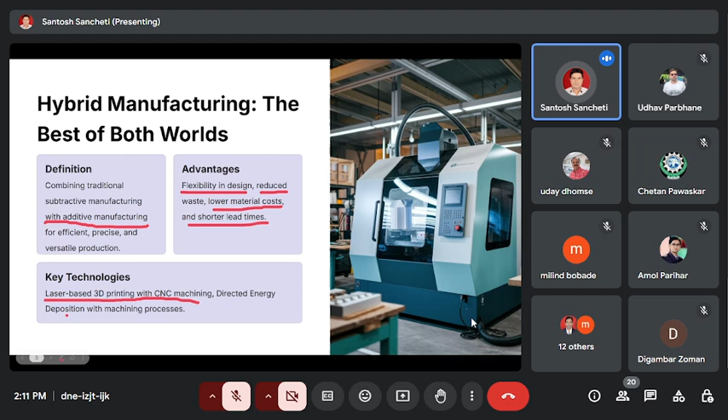Hybrid manufacturing can be utilized in the following areas, but is not limited to them. Nowadays it is applied in aerospace for custom parts, trial and error parts, lightweight structures, and high performance components. In the automobile sector, whenever industries are looking for prototyping, rapid tooling, and customization of parts, hybrid manufacturing provides great help. In the medical field, custom implants and prosthetics with high precision, and in tooling, the manufacturing of tools with complex geometry. So these are some areas where hybrid manufacturing is widely used: aerospace, automobile, medical, and tooling.

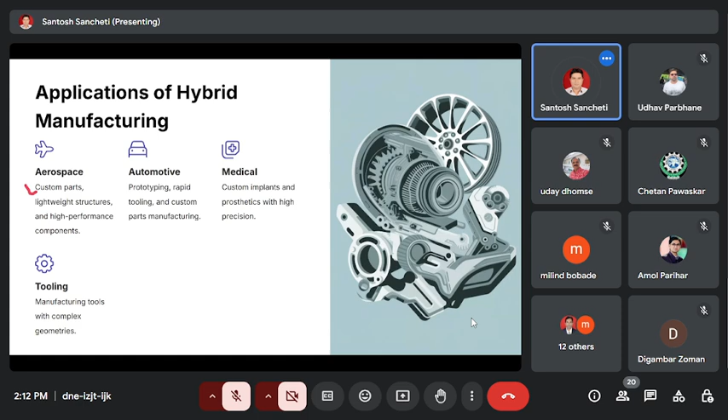Let us understand one case study, because here we have tried to give you insight through some case studies also. So let us have a look at one case study. This case study is GE Aviation's approach.

As a benefit, they have reduced the weight, the cost of material was reduced, efficiency was enhanced, and high performance was obtained. The key takeaway GE found by using this method is that hybrid manufacturing combines speed, accuracy, and material performance. Conventionally, when we talk about 3D printing, the problem we face is related to the speed of manufacturing. In hybrid manufacturing, the speed point is covered and we get the product manufactured with significantly high speed.

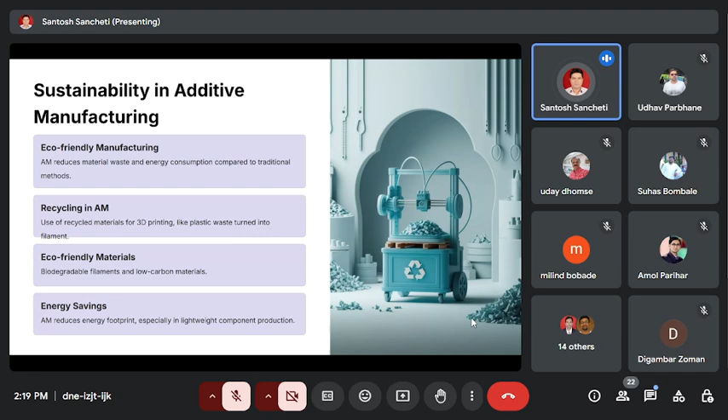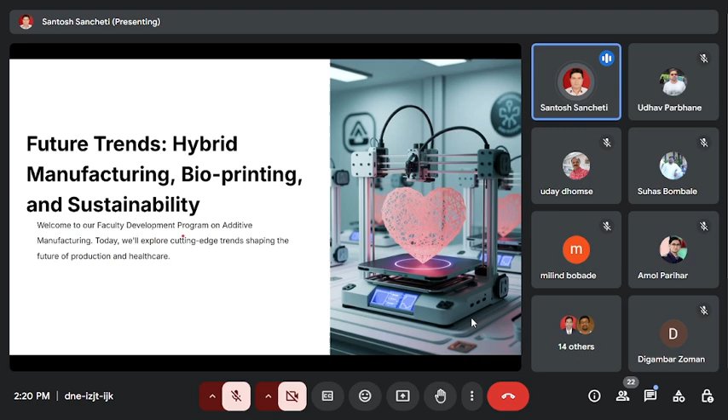So these are the three topics we are going to talk about today, three emerging areas: hybrid manufacturing, bioprinting, and sustainability. Let us understand each point in detail after understanding the topic.

Am I clear? Can somebody just chat or unmute and tell me? Am I clear after this? Yes, sir. Okay, thank you. Thank you, sir. Milind sir. Anyone else? Yes, sir. Okay, okay. Thank you, Nilesh.

So, the circular economy in additive manufacturing. The circular or sustainability point we are already discussing. So, the first point related to that is recycling. Here we can repurpose the plastic from e-waste or post-consumer products. It is possible. Material recovery: that waste material goes into new 3D prints.

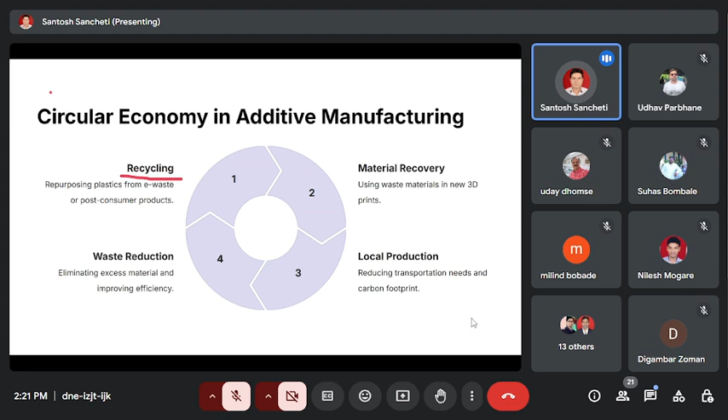Local production is possible, which reduces the transportation needs as well as the carbon footprint, because the component can be printed at the location itself and put into use, and waste can be reduced. So it will help the circular economy in the case of additive manufacturing.

Continuing on sustainability, a case study of additive manufacturing in the fashion area. Adidas, which is one of the famous companies for sports shoes and sports equipment, has used 3D printing to create recyclable footwear. Footwear is manufactured till date with the conventional process. Adidas has used this particular technology to create recyclable footwear.

Naturally, it will reduce the wastage, as well as give customer fit shoes, because till date whatever shoes are available come in standard size and shape. So with the help of 3D printing, custom fit shoes can be created. Particularly sports persons and athletes want custom fit shoes, so that helps them use the shoes as per their exact requirement. And naturally it will reduce the carbon emission also. So the fashion industry is also moving towards sustainability with the integration of additive manufacturing.

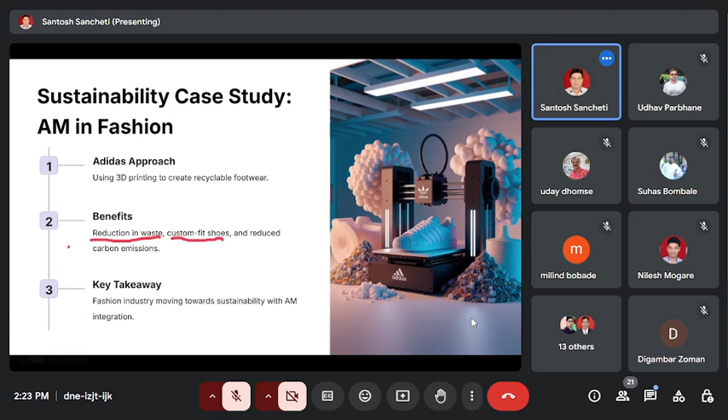So these are a few case studies where till date they have successfully implemented 3D printing technology in the different domains we are discussing. But still the journey is too long. Nowadays, we know it is the era of AI, and no sector in the world can stay apart from AI integration. Day before yesterday, if you read the newspaper, the AI integration technology used by a farmer in Baramati was appreciated by world technology leaders from Microsoft. Satya Nadella also appreciated it.

So AI integration into 3D printing is one of the key areas of research in the upcoming era, where AI algorithms will help us optimize the design and automate the production processes, because till date, for whatever 3D printing we are doing, we need to create a conventional design with the help of some CAD software and then import that file into the 3D printer. If we assist that process with AI, it will optimize the design and automate the production process also. So this is one of the future trends or emerging directions.

Then 3D printing in construction. Around the globe, we find 3D printing used for buildings as well as infrastructure with sustainable material. Some cases are available where an entire house or cabin is created with 3D printing using sustainable material. And advanced bioprinting: as we have already discussed, bioprinting is still in the baby phase, but with the developments coming up, the day is very near when printing full organs for transplantation will be possible with 3D printing.

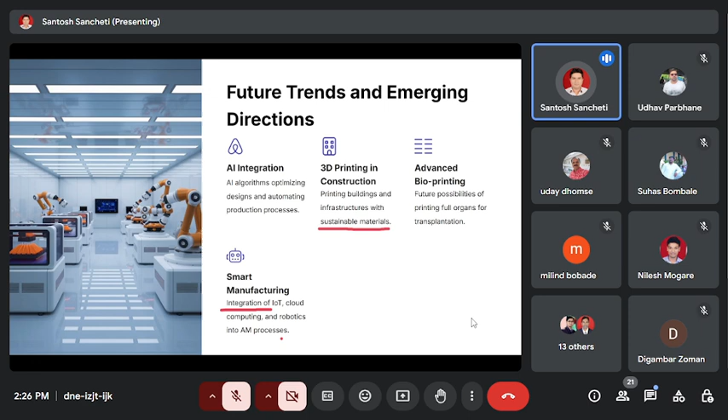And smart manufacturing, because in today's era manufacturing is nothing but the integration of all the technologies. So IoT integration is possible, cloud computing is also possible, and robotics can also be integrated into the additive manufacturing process. So these are all future trends as well as emerging directions. As you have already gone through a lot of things, I'm just trying to give you insight into the newer points only.

So, what are the challenges and opportunities for future additive manufacturing? Challenges right now: there are limitations of materials. Not all the materials we are using can be used for 3D printing. Scalability is an issue because the speed of 3D printing is very low, so scalability is one of the bigger issues. Regulatory hurdles exist, and the cost of components manufactured by 3D printing is considerably high.

But opportunities are available: innovation in material science. So whatever problems we are getting due to the limitations of materials, opportunities can come to our door as there is continuous innovation in material science. Just a few days back, at one of the summits, I met a startup founder who came up with the unique idea that the shoes manufactured by his company are made from waste plastic, and believe me, with this new concept, he is getting very good revenue from the market.

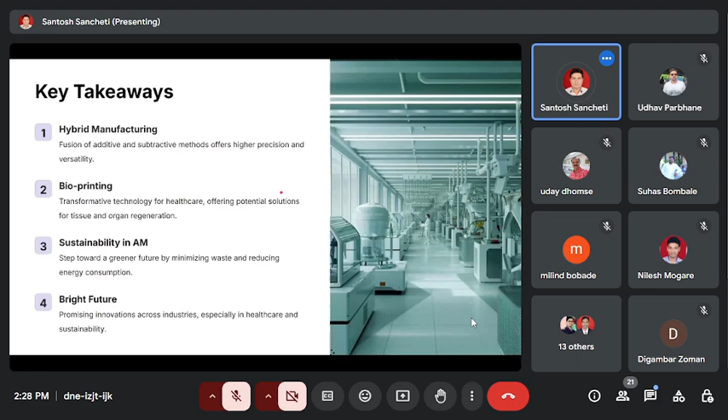Another opportunity is that rapid prototyping as well as customization is possible with 3D printing. And ethical considerations are driving healthcare innovation; again, there are innovations or opportunities available. So let us go into detail now. As I have given you a very clear idea about all the things, now we'll go through each and every point in detail. Our first point of discussion was hybrid manufacturing.

So hybrid manufacturing is very simple. Design or create a complex 3D part using CAD software. Use 3D printing to build a basic structure, layer by layer manufacturing. Refine the printed part using CNC or other subtractive methods. And finishing: if you need it, you can apply surface treatment or additional processes as and when needed. So this is, very simply, what hybrid manufacturing is.

So design is our regular process where we design a complex 3D part using CAD software. Then 3D printing builds the basic structure, layer by layer. Refine or machine the printed part using CNC or any other subtractive method. And in finishing, apply the surface treatment or additional process as and when needed.

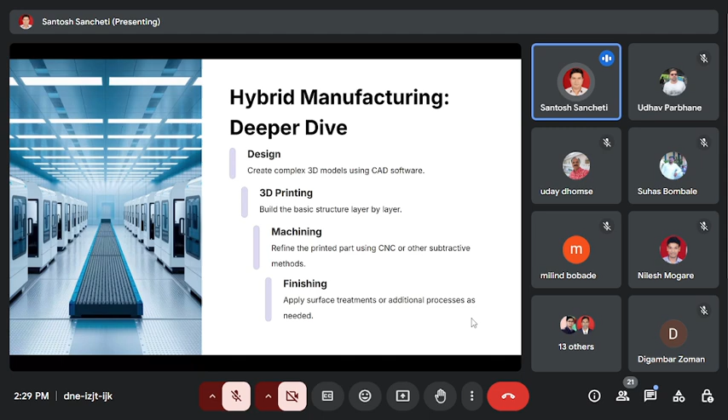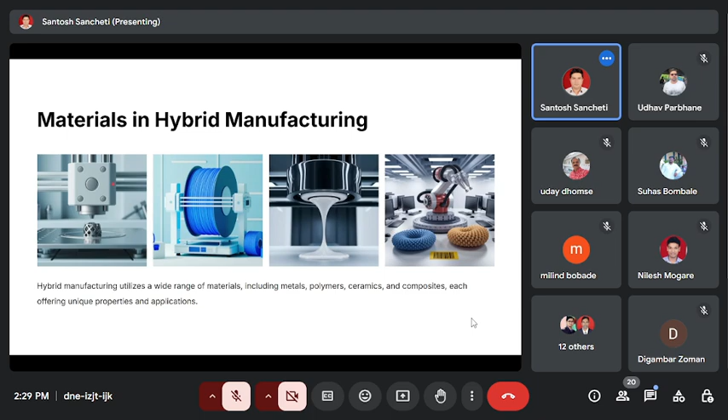Which are the materials used in hybrid manufacturing? Hybrid manufacturing can utilize a wide range of materials including metals, polymers, ceramics, and composites, and each material offers unique properties and applications. So these are the different materials that can be utilized in the 3D printing of hybrid manufacturing.

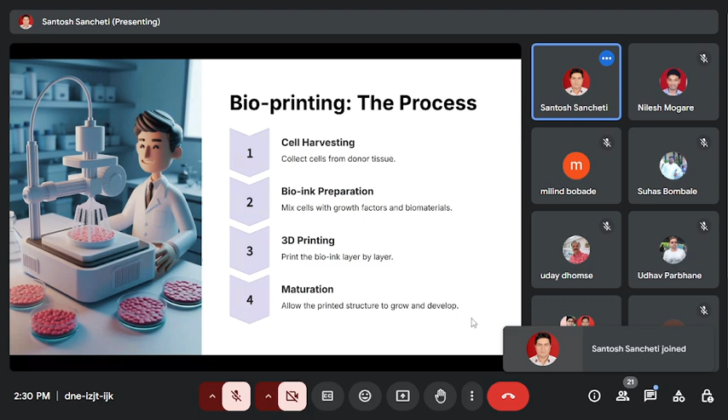Now let us go to the second part we are talking about, that is bioprinting. Before we really go into the area, this is a very interesting area. I will play one video and after that we'll go for the bioprinting discussion. Just a minute.

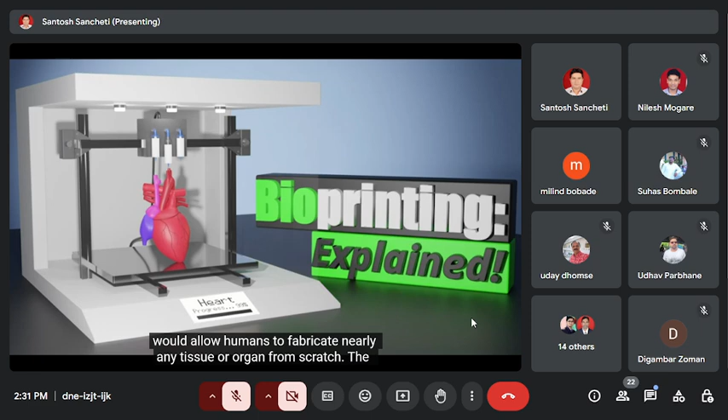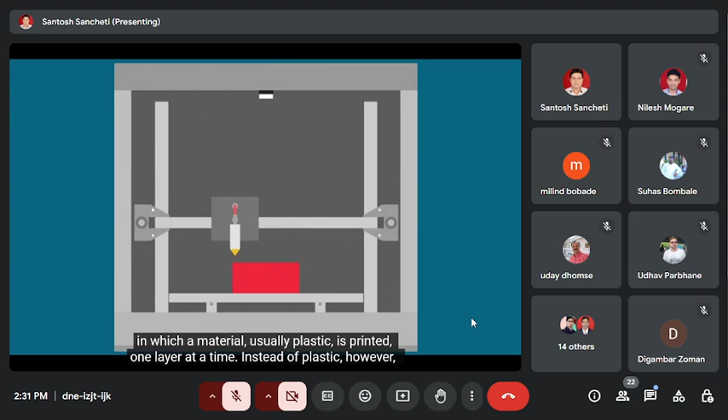Also known as bioprinting, is a relatively new technology that, in theory, would allow humans to fabricate nearly any tissue or organ from scratch. The fundamental idea behind bioprinting is quite similar to that of ordinary 3D printing, in which a material, usually plastic, is printed one layer at a time. Instead of plastic, however, bioprinters use bioink, usually composed of cells suspended in a special gel known as a hydrogel, which helps to protect, nourish, and hold the cells together. Some bioinks use a single type of cell, while others contain multiple types of cells, or multiple bioinks are used side by side, each with a different cell type.

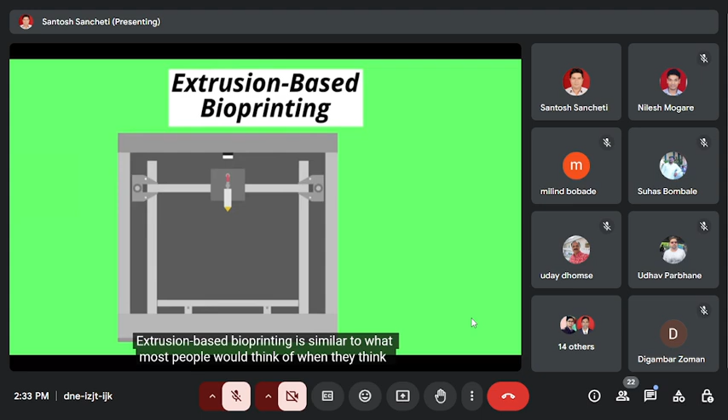There are three categories of bioprinting that I will be discussing in this video, which differ in the method by which they turn the bioink into a specific shape. Note that because this is an emerging technology, the exact names and classification of various methods vary from source to source. The concepts, however, are universal. I choose to group the methods into extrusion-based bioprinting, droplet-based bioprinting, and energy-based bioprinting. Extrusion-based bioprinting is similar to conventional 3D printers. It involves forcing continuous filaments of a material through a nozzle in a controlled manner to create a 3D structure. The material is bioink, which usually consists of cells and a hydrogel.

The filaments are forced through a nozzle by either pneumatic pressure, which is basically air pressure, or mechanically derived pressure from things like pistons or screws. The bioink must be stabilized quickly, or else it will not retain its shape. It can be stabilized in a number of ways, largely depending on the hydrogel used. For example, during printing, the bioink can be stabilized by spraying a mist with a cross-linking agent dissolved in it. Cross-linking just means linking one polymer chain to another. In contrast, droplet-based bioprinting deposits discrete volumes or droplets of bioink onto a surface. Methods include inkjet-based, microvalve-based, and laser-induced forward transfer bioprinting.

As with extrusion-based bioprinting, the bioink must be quickly stabilized in order for the structure to retain its shape, and the exact manner in which this is accomplished depends on the hydrogel being used.

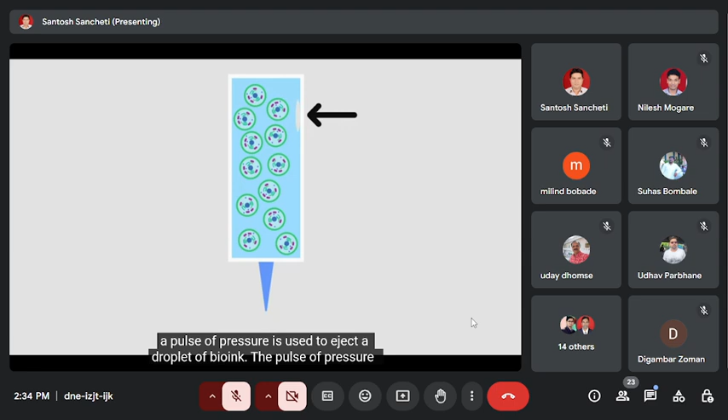Inkjet-based bioprinting shares a lot in common with traditional inkjet printing. Here's how it works. At a high level, a pulse of pressure is used to eject a droplet of bioink. The pulse of pressure can be generated in one of two ways, using thermal mechanisms or piezoelectric mechanisms.

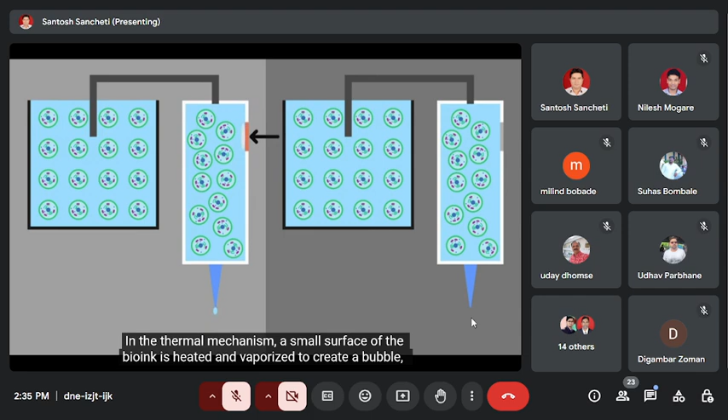In the thermal mechanism, a small surface of the bioink is heated and vaporized to create a bubble, which occupies a larger space than the liquid bioink did, creating pressure, forcing a droplet of bioink out of the nozzle. Once the bubble collapses, a bit of bioink is sucked from the reservoir, refilling the chamber, and the process is repeated.

In the piezoelectric mechanism, an electric current is applied to a piezoelectric actuator, causing the chamber to deform slightly, forcing a droplet of bioink out of the nozzle. By the way, a piezoelectric actuator is a device that responds to an electric current by stretching and bending. Then, when the electric current to the piezoelectric actuator ceases, the shape returns to normal, and a bit of bioink is sucked from the reservoir, refilling the chamber, and the process is repeated.

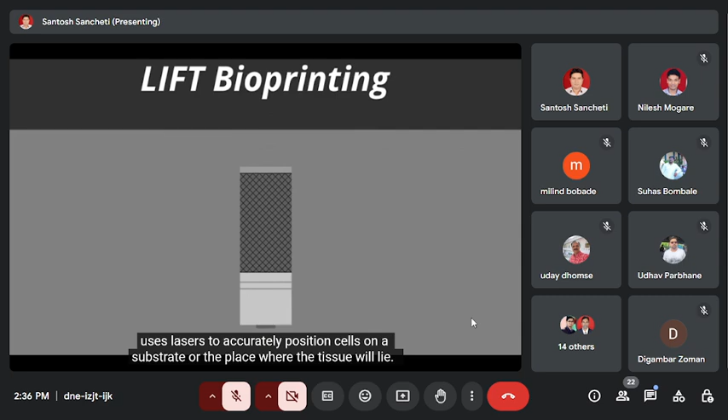Next, microvalve-based bioprinting involves small valves that can be accurately opened and closed with electromagnets to deposit droplets of bioink, which is under pressure, usually pneumatic pressure, meaning air pressure. Laser-induced forward transfer bioprinting uses lasers to accurately position cells on a substrate, or the place where the tissue will lie.

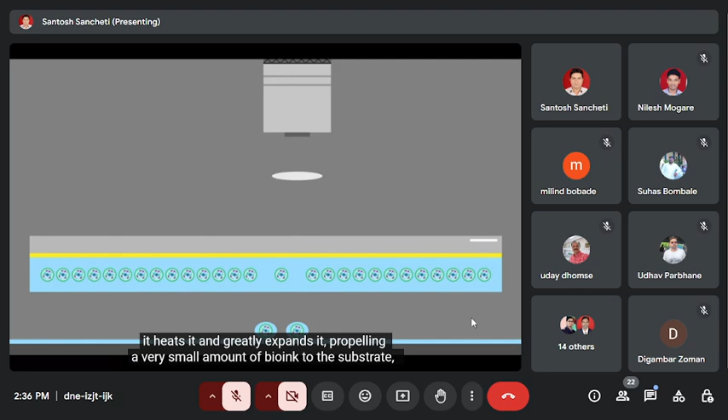Laser-induced forward transfer bioprinting consists of a laser, a focus lens, a ribbon, and a substrate. The ribbon could contain a sheet of transparent quartz glass with a very thin gold coating and a coating of bioink. When the laser reaches the gold, it heats it and greatly expands it, propelling a very small amount of bioink to the substrate, which will have been coated with hydrogel to dampen the kinetic energy of the droplet of bioink. This laser is quite precise, and hence this method is also quite precise.

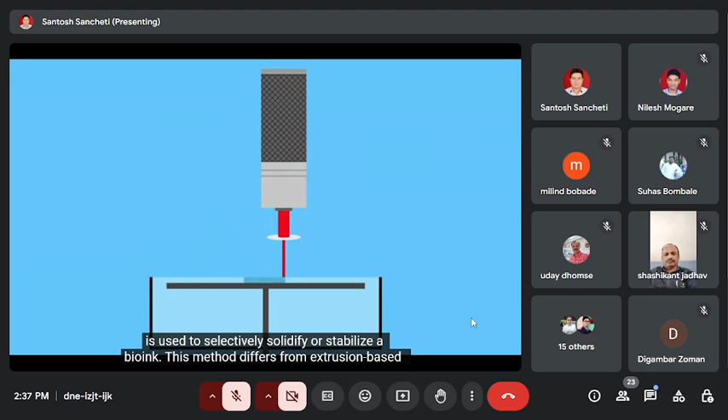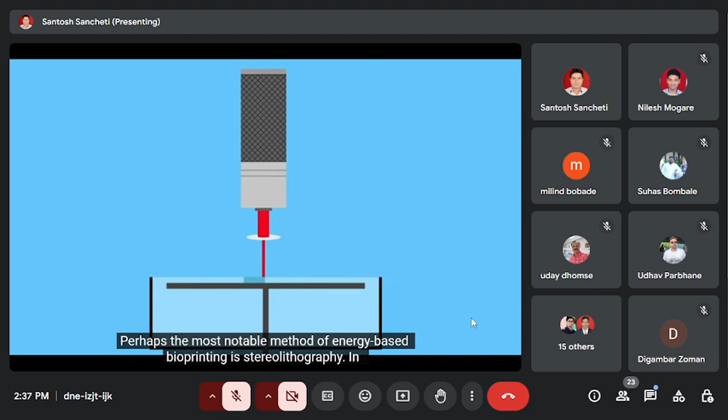Finally, in energy-based bioprinting, a focused energy source, often a laser, is used to selectively solidify or stabilize a bioink. This method differs from extrusion-based bioprinting and droplet-based bioprinting in that the bioink is already in place. Perhaps the most notable method of energy-based bioprinting is stereolithography. In stereolithography, a laser is employed to selectively harden a small amount of bioink, which contains a light-sensitive hydrogel.

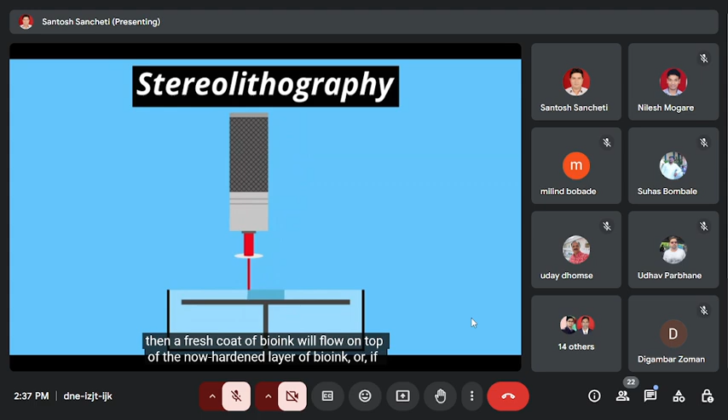This substance lies on a platform that is then moved away from the laser by a small amount. If, in doing so, the platform is immersed into bioink, then a fresh coat of bioink will flow on top of the now hardened layer of bioink, or if the platform has sidewalls, then a fresh layer of bioink can be coated separately. This process is repeated, eventually leaving you with a solid 3D structure once the liquid bioink is washed away.

Each category of bioprinting has its own pros and cons. I won't bore you with all the specifics. However, as an example, laser-induced forward transfer bioprinting is precise and has a high printing resolution. Nevertheless, it is expensive, cumbersome, and time-consuming. Hence, different methods are used for different needs.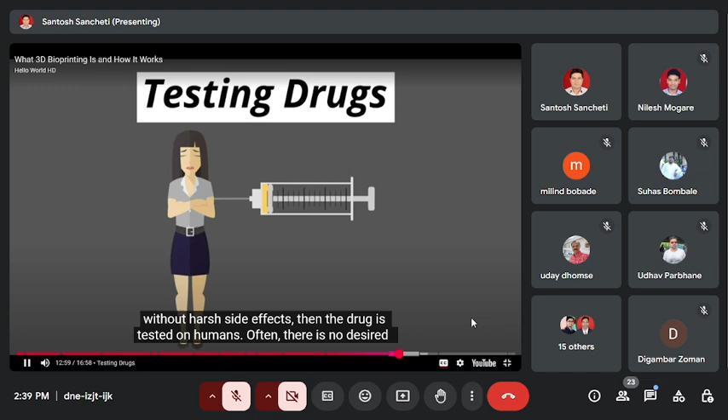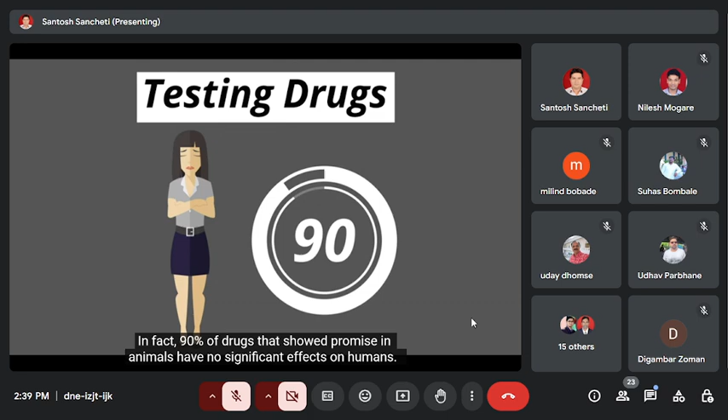...effects, then the drug is tested on humans. Often, there is no desired effect on humans, rendering the money invested in developing that drug a waste. In fact, 90% of drugs that showed promise in animals have no significant effects on humans. Occasionally, the drugs can even harm the humans being tested. This testing process is extremely expensive and inconvenient.

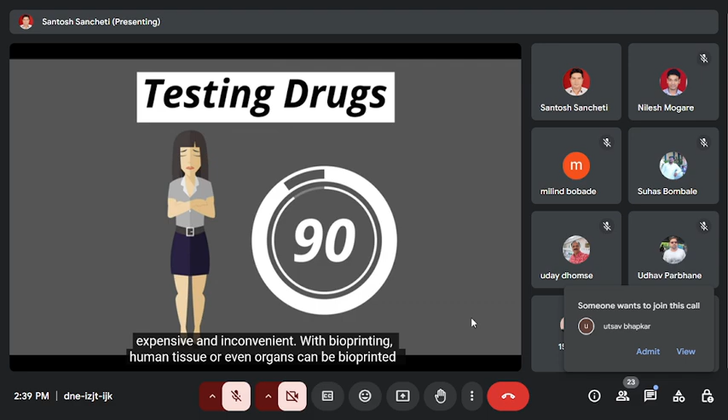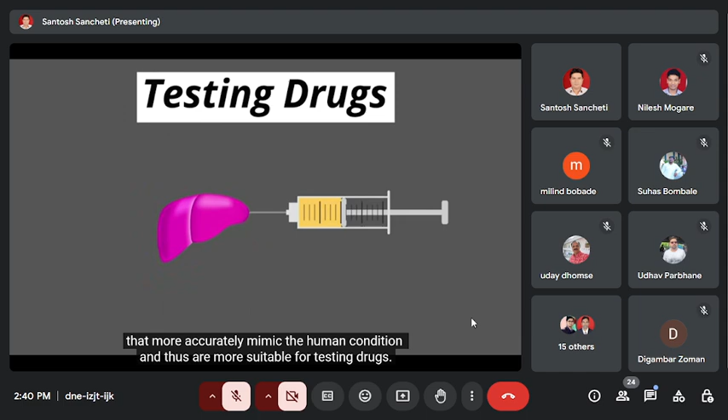With bioprinting, human tissue or even organs can be bioprinted that more accurately mimic the human condition and thus are more suitable for testing drugs. An organ on a chip is a simplified miniature version of an organ that aims to mimic a real organ so that it can be used to test a new drug. Technically, organs on chips are not inherently related to bioprinting, but bioprinted tissue can be used to enhance such devices with better positioning of cells and reproducibility.

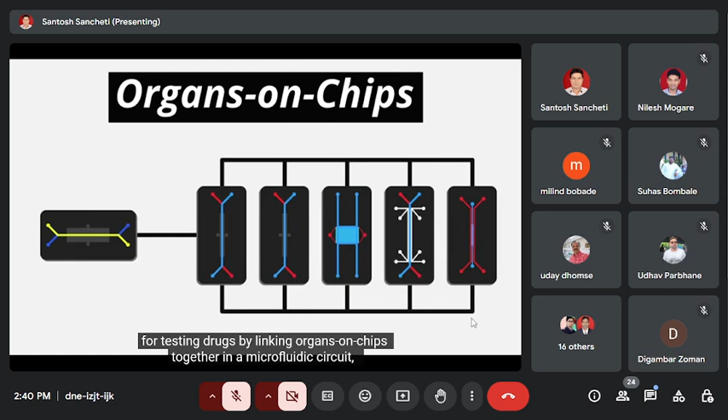In the near future, it may be possible to have a nearly perfectly accurate system for testing drugs by linking organs on chips together in a microfluidic circuit, which would be known as a human on a chip. What this means is that to test an oral drug, for example, the drug could first be introduced to a partially bioprinted gut on a chip, which would absorb the compound and send it to a partially bioprinted liver on a chip, where it is metabolized.

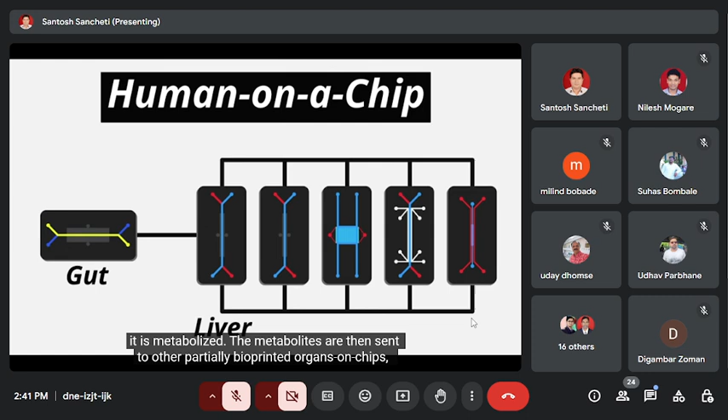The metabolites are then sent to other partially bioprinted organs on chips, including the kidney on a chip, heart on a chip, lung on a chip, and bone on a chip. Throughout this process, the organs are tested for any intended or unintended response to the drugs. A similar pipeline could be used to test the safety and effectiveness of other forms of drugs.

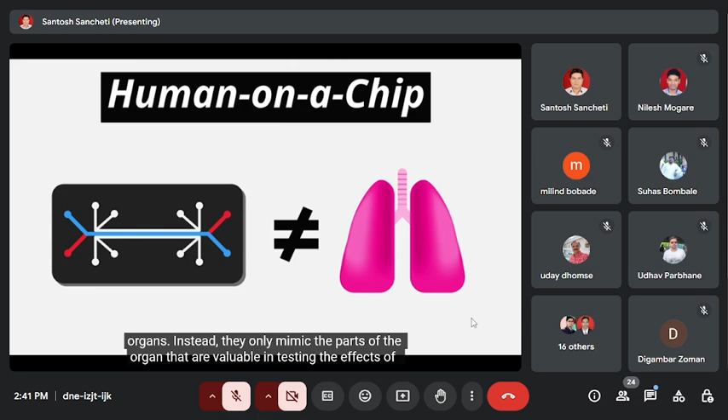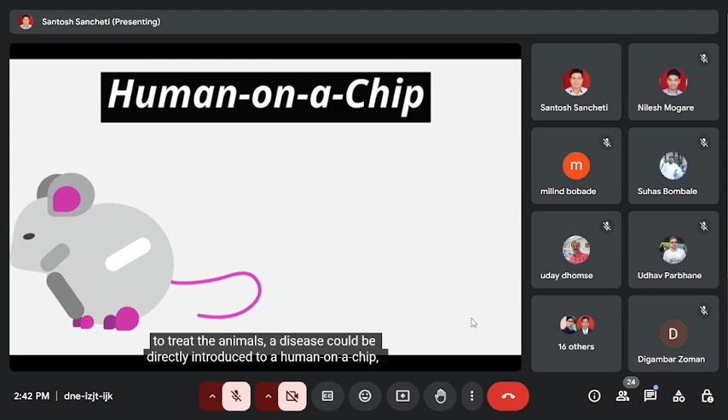Note that in this process, organs on chips need not have the full functionality of particular organs. Instead, they only mimic the parts of the organ that are valuable in testing the effects of a new drug. Also, instead of introducing a disease to healthy animals and then testing various drugs to treat the animals, a disease could be directly introduced to a human on a chip, reducing the amount of unnecessary suffering. In summary, using bioprinting to test new drugs could be both more efficient and more ethical.

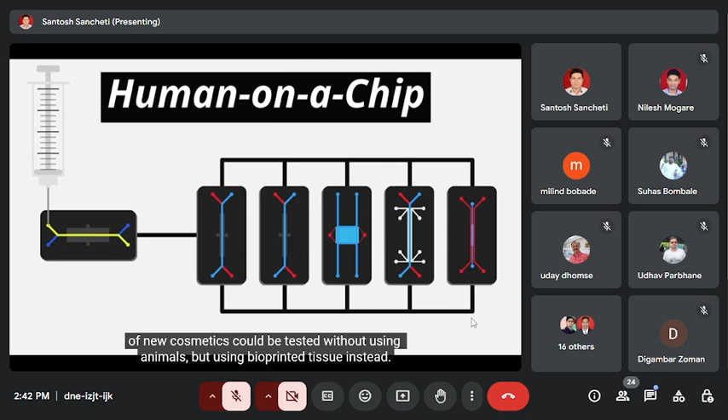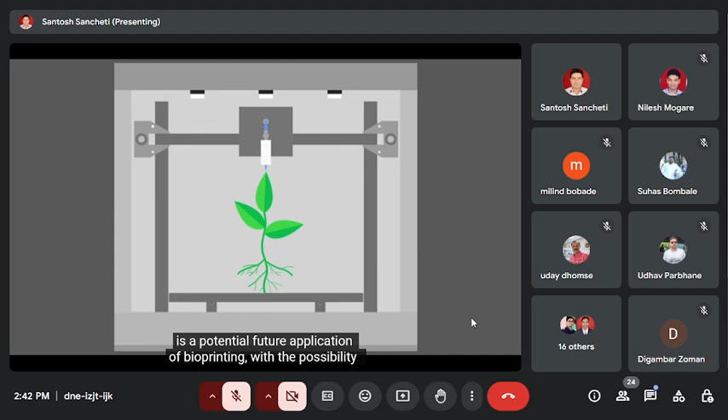In a similar way, the safety of new cosmetics could be tested without using animals, but using bioprinted tissue instead. Although it would come with important challenges of its own, bioprinting plants is a potential future application of bioprinting, with the possibility of creating new plant varieties with desired traits for agricultural use.

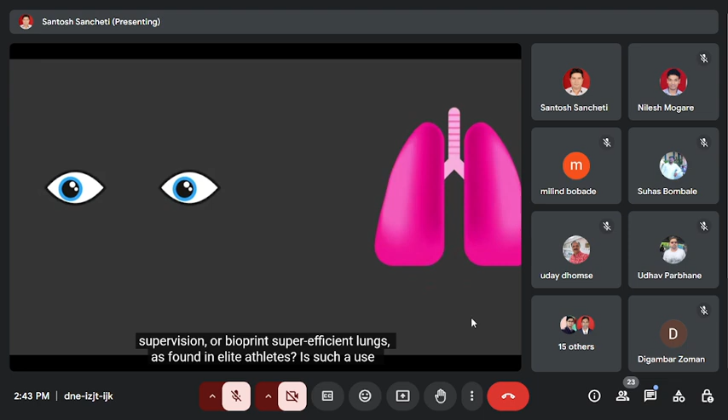Looking ahead, if or even when bioprinting fully functional organs is common practice, the following questions naturally arise. Can bioprinting be used to create organs with abilities superior to the organs that we are born with? For example, can we bioprint eyes with super vision, or bioprint super efficient lungs, as found in elite athletes? Is such a use of bioprinting ethical? Will bioprinted organs and super organs be reserved for the rich? These are important questions that we must ask ourselves as this technology is further developed.

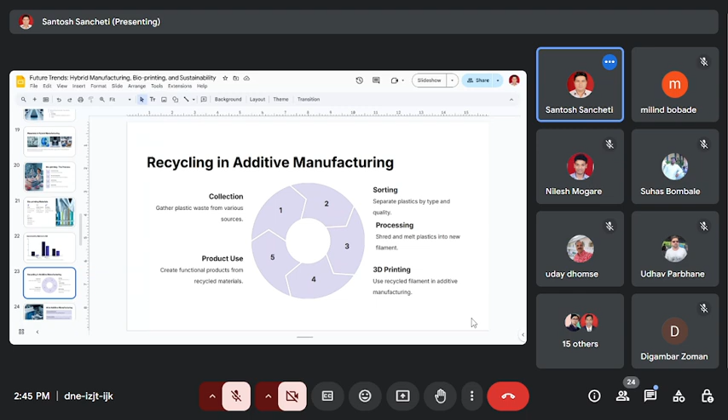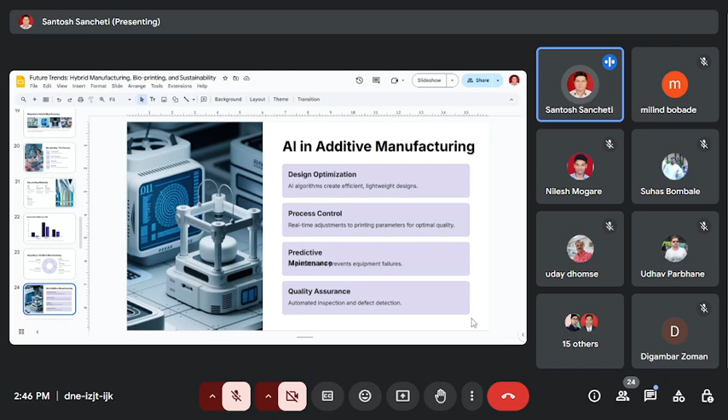Then, where this AI can be used in additive manufacturing. So for design optimization, AI is very useful, where AI algorithms can create efficient as well as lightweight designs. Also, whatever traditional analysis we are doing in the ANSYS software takes hours and hours, almost 8 hours, 10 hours, 20 hours to complete the simulation. With the help of AI integration, it can be done very quickly.

So design optimization is possible, process control is possible, that is, real-time adjustment to the printing parameters for getting optimum quality. Predictive maintenance is possible with the use of AI in additive manufacturing, and quality assurance, that is, automated inspection to detect the defects coming up.

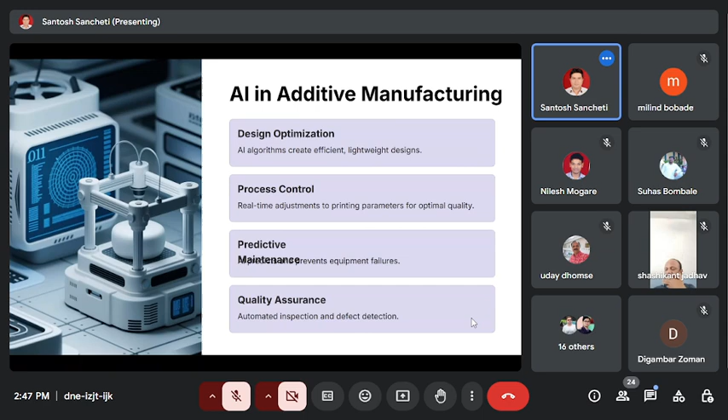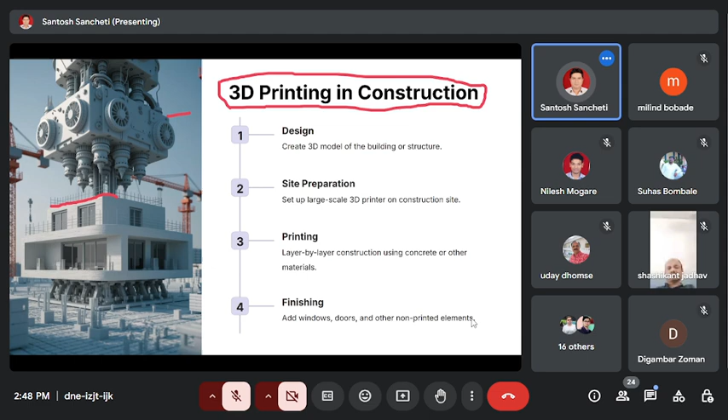Then printing layer by layer construction using concrete or other materials. So here you can see that layer by layer manufacturing is going on, and that construction is coming up. And finishing, that is, after this add windows, doors and other non-printed material to create a 3D printed construction. So again, a very interesting area; like bioprinting was one of the interesting areas, use of 3D printing in construction is again a very interesting area coming up.

This you have already seen in the basics of bioprinted organs, that full bio transplant is possible. Complex tissue structures can be created. Organ on a chip can be created, that is, a miniature organ model for drug testing that we have seen, and simple tissues like skin, cartilage, bone graft, etc. can be created.

As far as the smart manufacturing part is concerned, we can use some very important terminology in addition to this 3D printing. One is known as cloud computing, where we can store the centralized data and run the process. IoT sensors can also be integrated in order to have real-time monitoring of manufacturing processes. Robotics can be used for automated material handling and post processing, and digital twins can be created, where virtual replicas for simulation and optimization can be created.

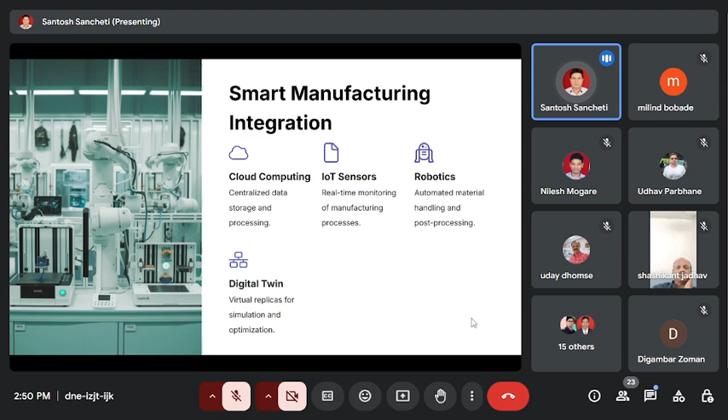So in the 3D printing future, all these things can be connected together, which will definitely improve the quality of manufacturing, and whatever problem we are facing, that the cost of manufacturing is considerably high, it can come down. So smart manufacturing integration is possible. And to achieve this, more diverse and printable materials are needed, because today we are limited to a range of materials. Inconsistency in the material properties will definitely create inconsistency of the final product. Cost we have, and for critical applications, getting certification of these printed parts is one of the challenges.

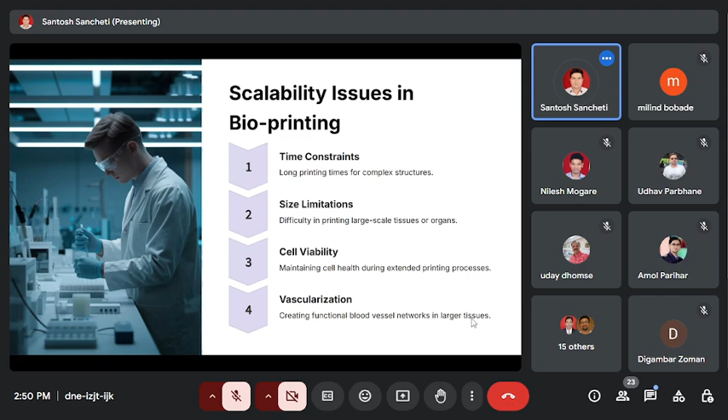For regulatory quality control, we need to ensure the consistency and safety of additive manufacturing products. Intellectual property: protecting design in the digital manufacturing era is one of the challenges, because once that file is created, protecting it becomes very difficult. A 3D scanner can simply scan that particular component, and protecting your IPR, that is intellectual property, can become a challenge.

Certification: even today there are no major standards available for giving certification for AM processes and materials. So this is one area where a lot of work is to be done for creating the certification. And liability, that is, determining the responsibility for additively manufactured product failure. So these are the regulatory challenges along with the advancement of the area coming up.

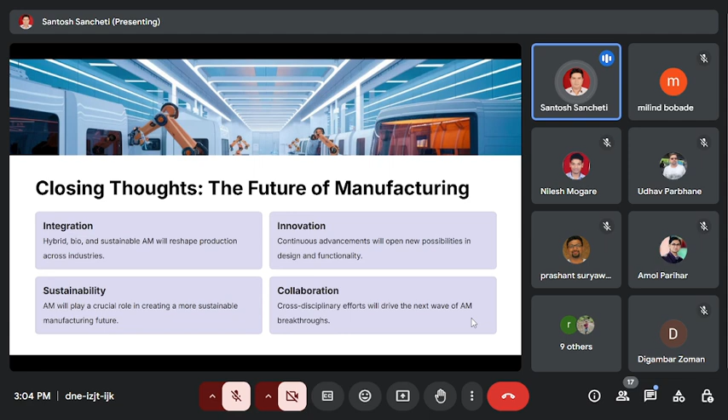When it comes to innovation, we have already seen a lot of fancy innovations available. Continuous advancement will open new possibilities in design and functionality. Additive manufacturing will play a crucial role in creating a more sustainable manufacturing future. And collaboration, where cross-disciplinary effort will drive the next wave of additive manufacturing breakthroughs. So these are the important points I thought I should put in front of you.